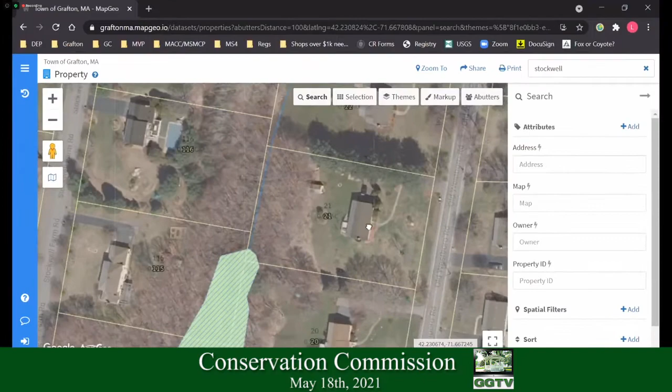I have some pictures from 2016 from an overhead view. If you look there from number 21, that's the small garden behind my land. Now the water has pretty much started to seep up, and it's narrowed down, heading toward the other end of the road where there's a collection point for the water. I don't know if there's a natural dam there or what. I'd like to have a landscaper come in and put some fill in to keep the water from slowly climbing onto my property, near the shed. If you look to the upper left, right above number 21, that's my shed.

My wife and I discussed it, and we do not want to go into the wood line at all. We'd rather leave the trees there because they're actually quite beneficial in soaking up a lot of the water, and for privacy. But we'd like to get the commission's view. I have pictures of having a local landscaper come in to put in some fill and a small drain, to focus the water heading downstream toward the collection point at the end of the road. I think we're looking south, down the south end of the road.

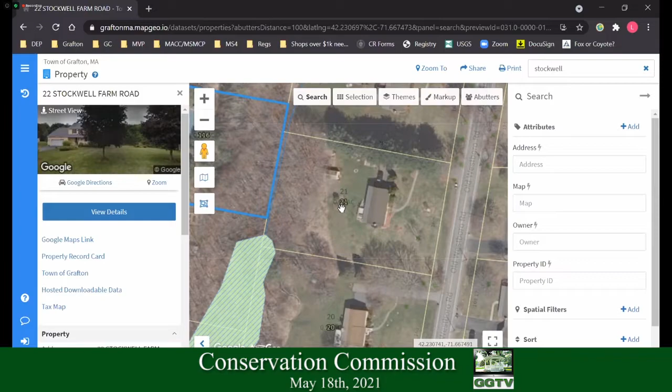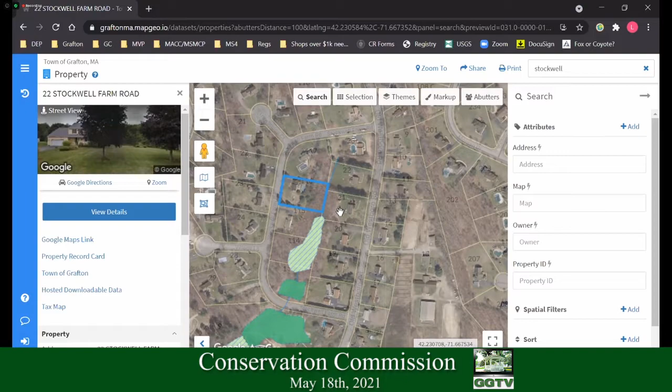So one of the things, I'm just looking at it to see how it all flows down. I just want to make sure nothing's happening that's causing a backup or additional water to come down that's impacting your property, because that means it's also impacting the site.

So there's a few different things we can recommend, but I think one thing we could do is go out to your site to get a better idea. Do you have the photos that...

That Bill brought in or sent to you, Leah? They haven't been sent to me. I don't have them. All right, well, I have them here on my computer. I'm not sure exactly how to import them to you. Yeah, it's the way the Zoom is set up, we can't let you share. It's because of the type of system it is.

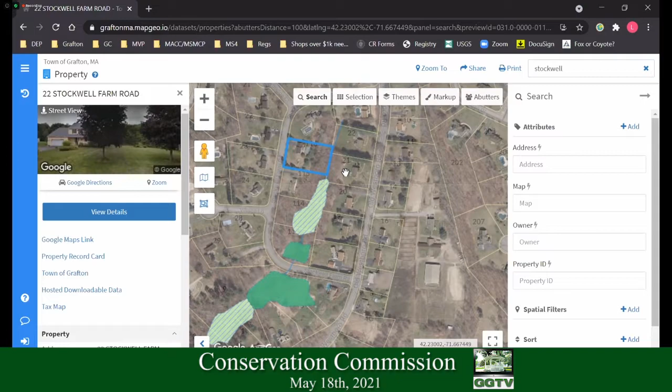So I guess I'd give you the steps we'd want to do. First is to establish what the resource areas are underneath the Wetlands Protection Act, because that's going to tell you what you need to do with this commission. The Conservation Commission enforces and is the permitting authority for the Wetlands Protection Act and the local wetland bylaw in Grafton. So that's our jurisdiction. The first thing we need to do is get you direction to see if you actually fall within our jurisdiction.

If you do not, which I don't think - I think some part of your site probably does fall in our jurisdiction - but if you did not, you could add the fill without coming to us. If you're within a certain distance to the wetlands resource areas, there's a 100-foot buffer zone, and that buffer zone is a jurisdictional area. So you may have to do what's called the request for determination of applicability.

I'm sorry, this is going to get filled with lots of initials and everything. That's a fairly straightforward permit just to let us know what you're doing, not actually in the resource area or the wetlands - you're doing it in your backyard, but you're close to it, so we want to protect it so you don't have erosion going into it. That's fairly straightforward.

If that stream in the back was a perennial stream, which I don't think so, because it's what's called a first order stream and it doesn't look like it has a watershed for it - if it's a perennial stream, then there's a different resource associated with that. So the first step is just to figure out if you're in the jurisdiction.

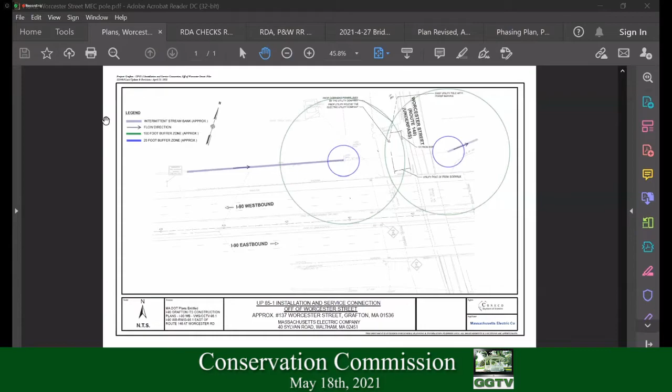Okay, can I have a plan? So this project is for the installation of a new utility pole, a guy wire anchor, and overhead wires connecting to another utility pole located about 70 feet north of the proposed location. This utility pole is going to service a new Mass DOT I-90 message sign, which will be installed by others.

So I don't know if you can see right here, I don't have access to my mouse, so I can't point to things. Is that correct? Correct. Okay, so left of the word underpass, you'll see there's a circle with a line on each side of it. That's the location of the new pole, approximately 25 feet from the back of the sidewalk. I don't know if you can see, near the words Worcester Street sidewalk, it says 25 feet from the sidewalk.

So the new pole is going to be about 25 feet off the sidewalk and within 100 feet of an intermittent stream that flows from the west to the east, to a 36 inch RCP head wall culvert underneath the Route 140 roadway, to the other side of the roadway, daylighting and continuing down west along the bottom of the I-90 westbound slope.

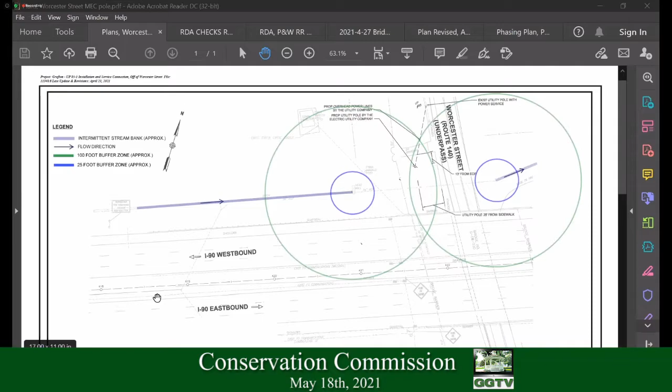The utility pole is going to be installed in a previously disturbed area within the I-90 right-of-way. If you open up the photos, you can see it's a very disturbed area. The utility pole location is to the right of this photo, in the back near where the car is, right near the fence line.

There's a stake. Can you zoom in a little bit to the right? Maybe zoom in a little more. There, the stake is right there. Yes, right there, that's the stake.

So it's a disturbed right-of-way, sparsely vegetated with grass, kind of like bare soil in a lot of locations. The utility pole, guy wire, and anchor will be installed in that location. And the intermittent stream is on the other side of this chain link fence.

I don't know if you can see the chain link fence here. If you can point to the chain link fence, the stream is on the other side of the fence, approximately 75 feet from the proposed utility pole location.

If you have any other pictures showing the stream itself, do you have more pictures than this one? I think they're further down.

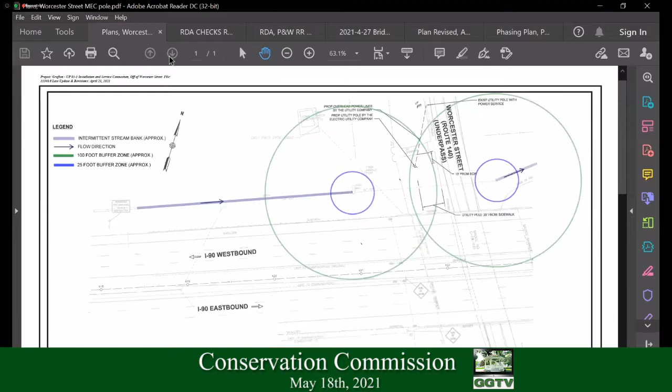And if you can go back to the plan. So the guy wire, I don't know if you can see the guy wire. The proposed overhead wire is going to be from this new pole north to Pole 85, approximately 75 feet north of the proposed pole.

And all the work is generally going to be constructed with all the equipment on the shoulder, the previously impacted shoulder, or from the pavement itself within the right-of-way.

Once the utility pole equipment is used, it will be a hydraulic auger. An auger will come into the site, dig out the soil, and then another truck will come in and place the pole. Soil will be reinstalled around the pole, tamped in, and then the line will be hooked up with a bucket truck from Pole 85-1 to 85.

During construction, best management practices will be used. Fiber rolls will be installed if necessary. The area will be returned to pre-construction conditions, and if there are any catch basins within the area, they will be fitted with silt sacks.

Another thing to note is this particular stream's head wall is actually upslope from the proposed utility pole. So if there were to be any runoff, it would move from the utility pole towards Worcester Street itself.

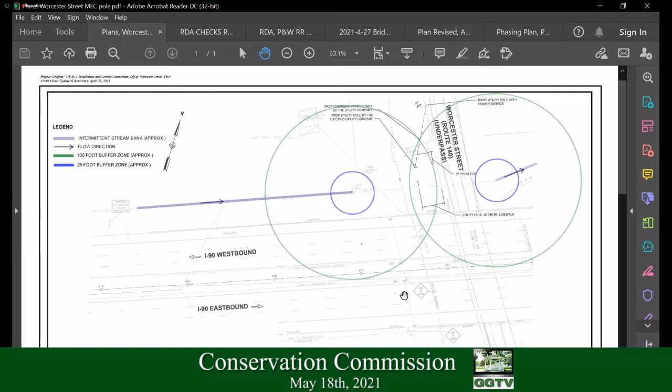So first we'll do a roll call of the commissioners to see if there are any questions. Alicia, do you have any questions on this? I do not have any questions, it sounds pretty straightforward. John, do you have any questions? No questions. Patrick, do you have any questions? No. Okay, I know Leah had some comments in her report.

The pole's within 75 feet of the intermittent stream. Under the local bylaw, we have exceptions for maintenance and replacement, but not new installs. But we'll continue on and talk about it.

Also, a good comment from the interdepartmental meeting: the engineering department wanted to remind the applicant that Worcester Street is owned and maintained by MassDOT, so the town doesn't have jurisdiction, meaning any access permits will need to go through the state.

This is actually their project, correct? Correct, yes, it's MassDOT's project. We're installing the pole per their request so that they can hook up their message sign.

So the pole's going in, and the new line to that new pole is going to be overhead. Correct, yeah, so there may be a need for trimming some vegetation, just branches if they're in the way of the line. And then when it goes from the new pole to the new sign, is that also overhead?

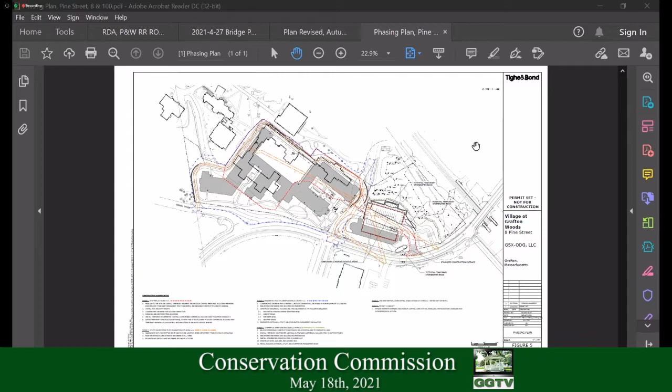What we've done is we went back with the general contractor for the development and really talked about how this whole thing was going to get built, what the phasing actually will look like, and where we'll be accessing the site. So this plan now reflects a more tuned phasing scheme. It looks kind of difficult to read, so I might provide you with a new one that's not so awkward looking, if that's okay with everybody. I could probably provide that to you tomorrow, because this one does look a little confusing now that I'm seeing it on the screen.

But generally, we included areas of disturbance for each phase as requested, and that's in the notes at the bottom. I want to point out that one phase, the largest phase, is the construction of the residential parking garage and the building, and that's about 6.5 acres. So I know that's bigger than our 5-acre goal. But I want to remind the commission that once that's cleared and we get the foundation in for the residential building, we only have about 1.5 acres of disturbed earth outside of that. So once the concrete's down for the parking garage and building foundation slab, substantially less disturbance will be open as part of that particular phase.

So I know you haven't seen that yet. I do want you to digest it before I talk more about it, unless anybody has any specific questions right off the bat. I do not, I'll do a roll call afterwards. So please keep on going.

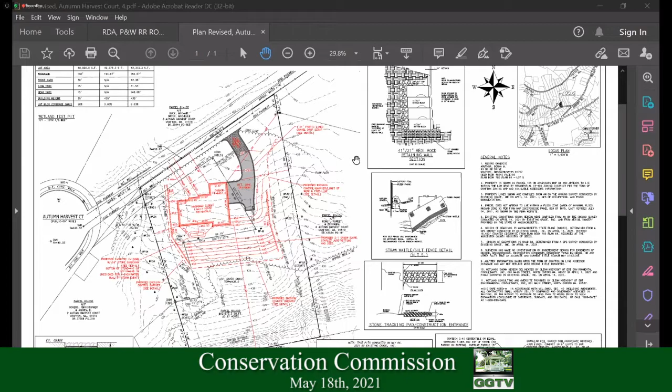There's a flow path to the east that we know the Grafton bylaw covers, and it had been delineated in the past on the previous application. Then there is an intermittent stream with BVW on the west side of the project. We showed the 25-foot buffers we're respecting on both sides. Single-family house, again existing grades, out of Douglas did the work. We had to answer a few questions on water table fees. I'm looking for the rest of my paperwork on this. I believe your agent might say we answered the questions she asked. And that's the project.

All right, thank you very much. I'll do a quick roll call of the commissioners to see if they have any questions, and just to note that Leah did confirm that the sewer department confirmed the hookup is available. I will go around, and also note there were no DEP comments.

Alicia: No questions, I looked through everything, it looks pretty straightforward. Patrick: No questions. John: No questions. Okay, it does seem fairly straightforward with town sewer and water. You are staying outside the 25 foot.

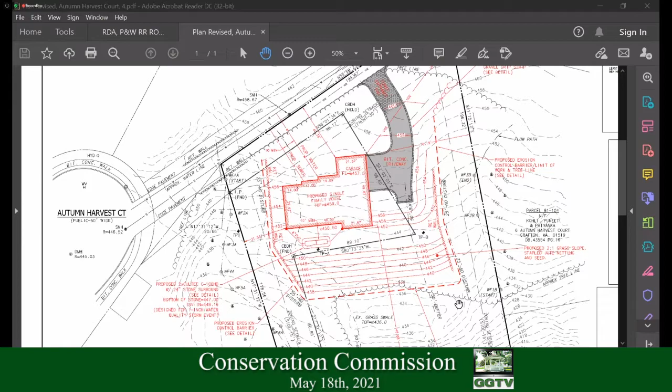Yes. And probably, Leah, other than standard conditions, signs and erosion, etc., any other special conditions? No, just the standard ones. Okay, I will open it up to the public. If there's anyone attending with questions or comments, please use the chat feature, and please address it to all panelists. I'll wait a moment on that. I have no other questions.

I'm just waiting a minute to see if anyone in the public says anything. Not seeing anyone. Do I have a motion to close the hearing and issue an order of conditions?

I make a motion to close the hearing for 4 Autumn Harvest Court and issue an order with the standard conditions. Do I have a second? Second. I'll do a roll call vote. Alicia? Yes. Patrick? Yes. John? Yes. I am also yes, and the motion carries.

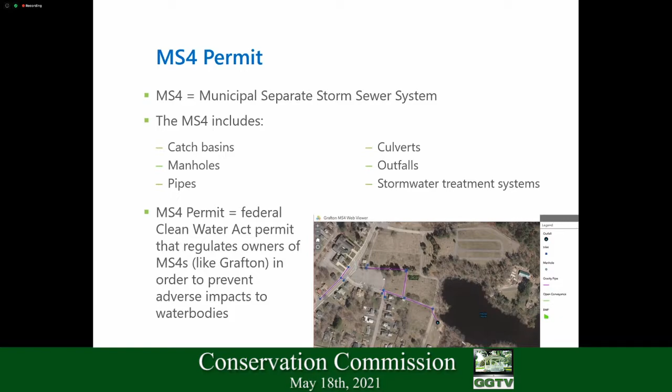So there's a lot of different things that Grafton has to do under the MS4 permit, but one of those is implementing a stormwater management bylaw and associated regulations, and so that's what we're talking about today. Basically, this stormwater management bylaw regulates construction sites and then also what happens to those sites after construction, and makes sure the stormwater runoff, once that site is fully developed, is also not causing downstream impacts.

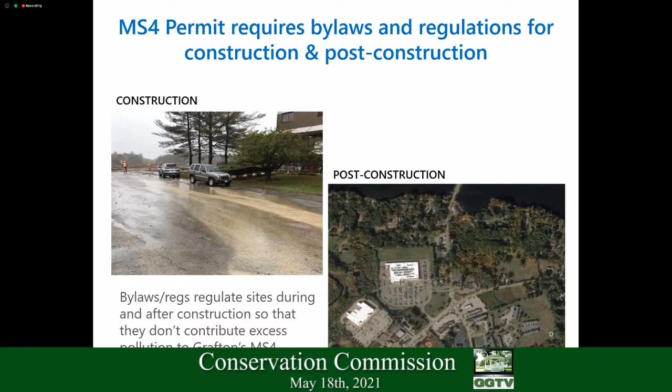Next slide. So to get a little more into the specifics of your stormwater management bylaw and regulations - the basics that have always been in place - it's Article 36, as you probably already know. The stormwater bylaw applies to all land disturbance over 40,000 square feet or 1,000 cubic yards, or if a project is part of a common plan that disturbs that much land. It applies to anywhere in Grafton, so that's where things might get confusing. The wetland protection stuff only applies to wetland resource areas, but this bylaw applies to all of Grafton. So even if you're in an upland and you're trying to develop a site, you still have to comply with all the provisions in these regulations.

And then, like I mentioned earlier, the bylaw and regulations focus on regulating sites during construction and after construction. And then the other thing I should have mentioned, but failed to put on the slide, is the Stormwater Authority listed in the bylaw is the Conservation Commission. So you are responsible for enforcing this bylaw.

All right, next slide. So just to give you a little more of a sense of what's in it, what's always been in it, there's a lot of provisions regulating construction - making sure sediment and erosion control is in place, requiring the proper disposal of waste from construction sites. And then there's enforcement procedures, so you all have the authority to inspect these sites to make sure that they are in compliance with your regulations and give penalties if they're not. Next slide.

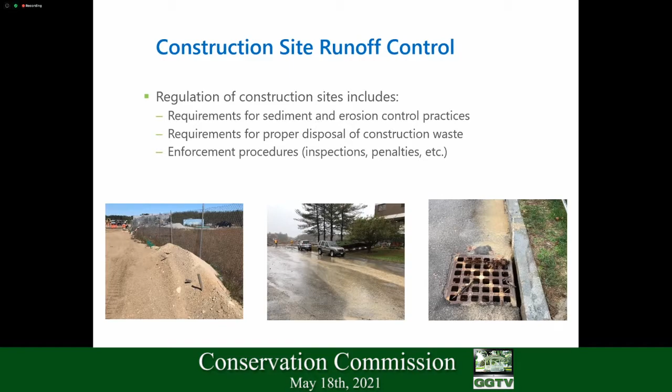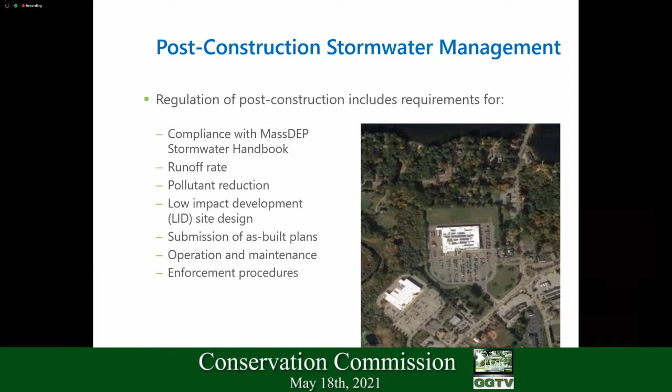So the last thing I wanted to talk about is what has changed in this bylaw and these regulations in recent months, or what will be passed after town meeting. The most recent MS4 permit came out in 2018, and that required that Grafton make certain updates to your bylaws and regulations to make things more stringent.

One thing that changed is there are now more stringent water quality standards, actually more stringent than what's in the DEP handbook. For new development, a project has to remove 90% of all total suspended solids and 60% of all total phosphorus. It's a little less for redevelopment because of more constraints, but still pretty high, especially since before it used to be 'to the maximum extent practicable.'

There's also a new requirement that stormwater treatment measures should be optimized to treat phosphorus and nitrogen. There are also special provisions for commercial and industrial sites—BMPs and stormwater treatment have to have shutdown and containment measures, that kind of thing. Finally, there's a new offsite mitigation provision that allows, if you have a redevelopment site where you just cannot meet your water quality performance standards, you can now use another nearby site to help meet those performance standards. So those are the main new things about the revisions.

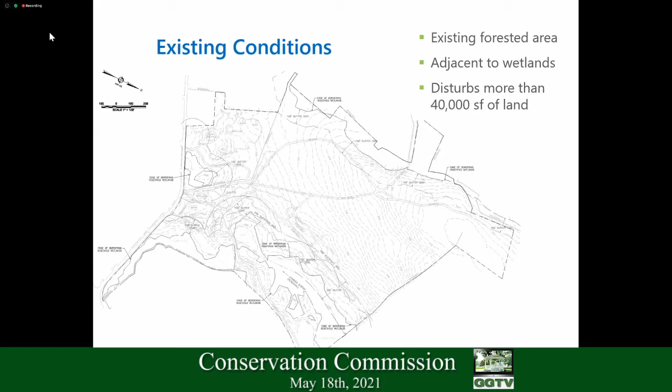If you go to the next slide, and then if we zoom in and look at one location to get more detailed - if we take this infiltration basin and look at the drainage area to this one, if you click once - this is the drainage area here, it's going to be collecting everything within here, but the roofs and driveways are already going to the trenches and the rain garden. So it's really the remaining impervious area, which is the road, that needs to get treated by this infiltration basin.

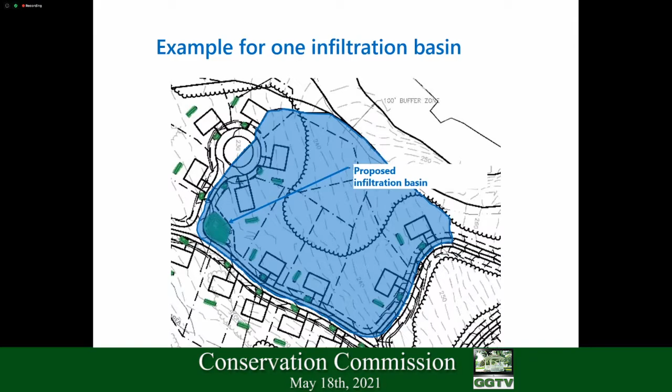You can see on the left there's the percent pollutant reduction, and on the bottom x-axis is the runoff depth from the impervious area that is getting treated.

For this specific example, if we wanted to show we're meeting our 90% TSS reduction, you start at the 90% on the left, go to the TSS curve, then go straight down, and you need to treat 0.32 inches of runoff to get your 90% TSS reduction.

Now to check TP, you start at the 60% on the left, go over to your TP line, go down, and you need to actually treat 0.23 inches to get your 60% TP reduction.

So to get your 90% TSS and your 60% TP reductions, you need to provide a basin volume that infiltrates at least 0.32 inches of runoff depth over that impervious area, because you need to show you're meeting both.

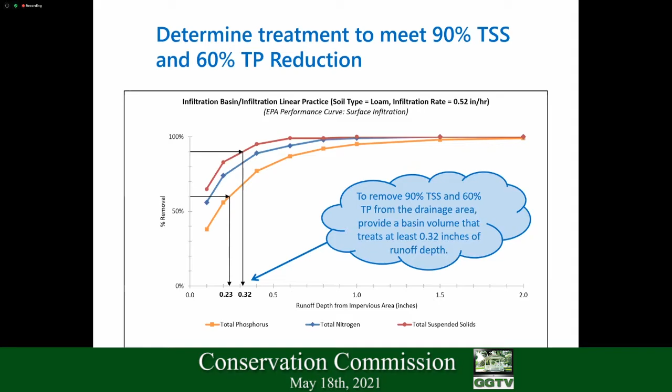So the key takeaways: we went through the basics, stormwater treatment is critical to improving water quality in local water bodies. Your MS4 permit has its own pollutant load reductions required in addition to the MassDEP stormwater standards, that's standard 4.

In general, you're going to be seeing more stormwater treatment, and you're going to be seeing it more in redevelopment projects. Those projects are going to be harder to meet sometimes because there's constraints, and sometimes it'll be really tricky to try and meet those reductions with the existing site layout that's there already.

And of course we want to keep encouraging low impact development and green infrastructure and infiltration in order to improve our stormwater runoff and comply with the MS4 permit. So those are the big takeaways.